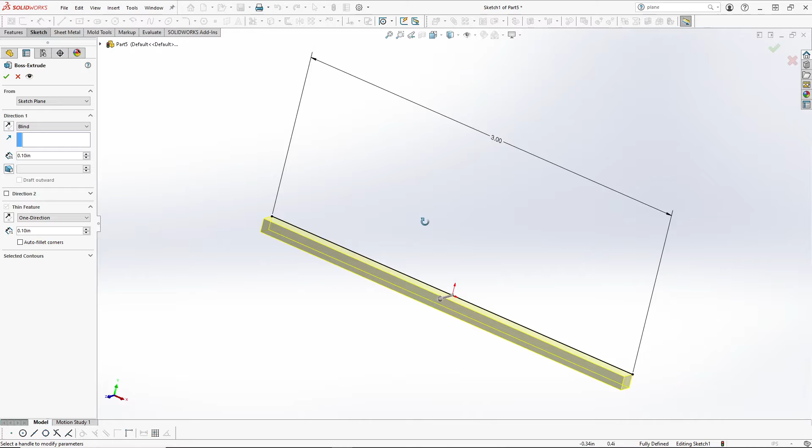Now this allows you to create a thin feature. It automatically associates itself as such because you used only a one-dimensional object, and it's going to project 3 dimensions from that single dimensional object. Now if you look at the line, you can see that depending on the settings, it projects the other 2 dimensions in various ways. So if we're looking, this is the line that we started with, and this is the projection.

So if I change the direction, it changes which way it extrudes the thickness of the material in that way. Same with a thin feature. Now, if we set both of these directions to midplane, then you'll notice that the line that we drew is centered. So it's projecting 1/2 of the depth in both directions.

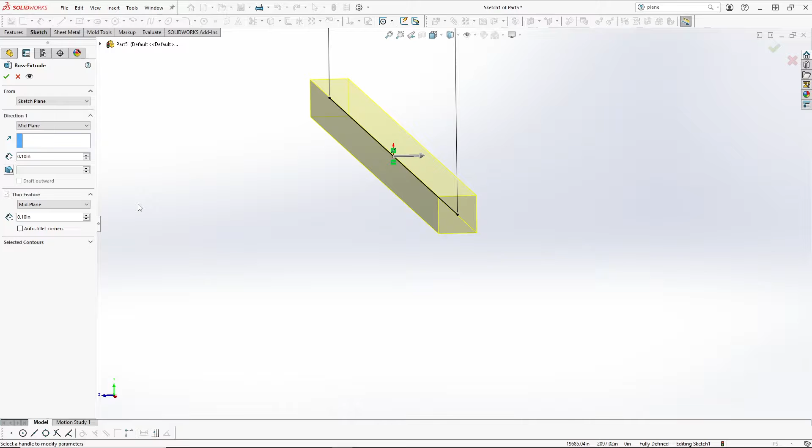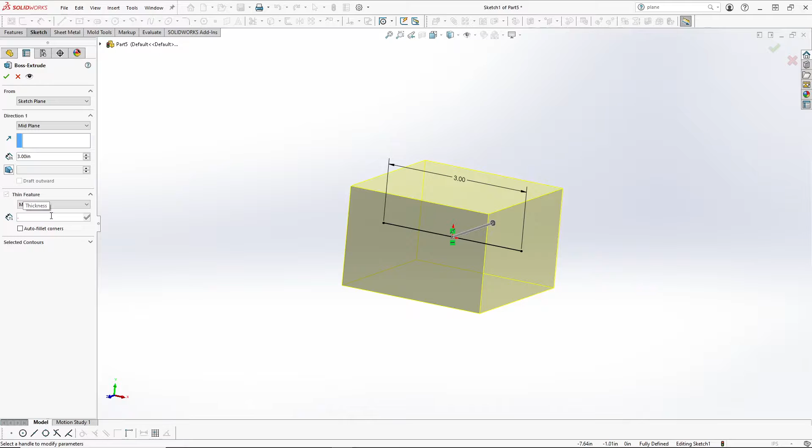With it categorizing this as a thin feature, they do not set limitations for how much thickness you can apply. So you can start with a line and actually end up with a cube. You can make cubes of different thicknesses just depending on which way you want to go with it. It really doesn't matter. You can also do 0.05 and basically create like a piece of sheet metal. The possibilities are endless with just a line and this command.

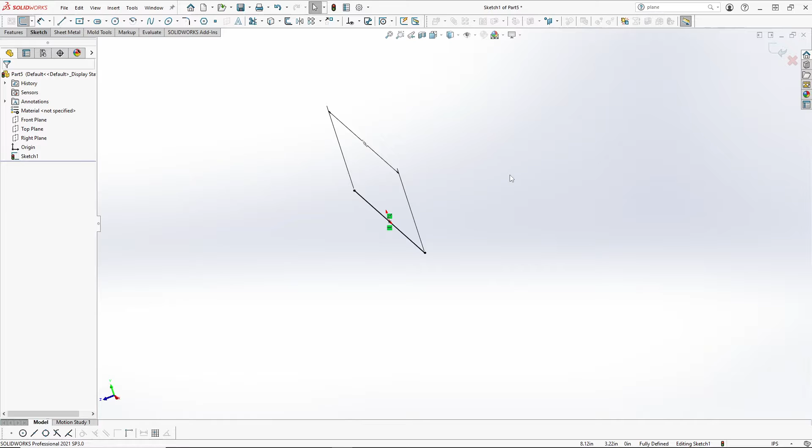Let's back up and look at this same concept but with a different shape. So I'm going to go ahead and get normal to the plane, delete what we just put in there, and let's do a center rectangle. Again, for the purposes of this tutorial, it doesn't really matter what size you make it. And then that time I used the escape key to exit the command. I could have also clicked the OK or the green check mark.

Now, we will go back into our Extruded Boss/Base command, and you will notice that it is assuming that you just want to make a 3D solid object based off of two-dimensional objects. You have dimension 1, dimension 2, and this will be your third dimension, the thickness or the extrusion. So we can play with the different settings, put in whatever thicknesses we want, utilize mid-plane. It's pretty versatile.

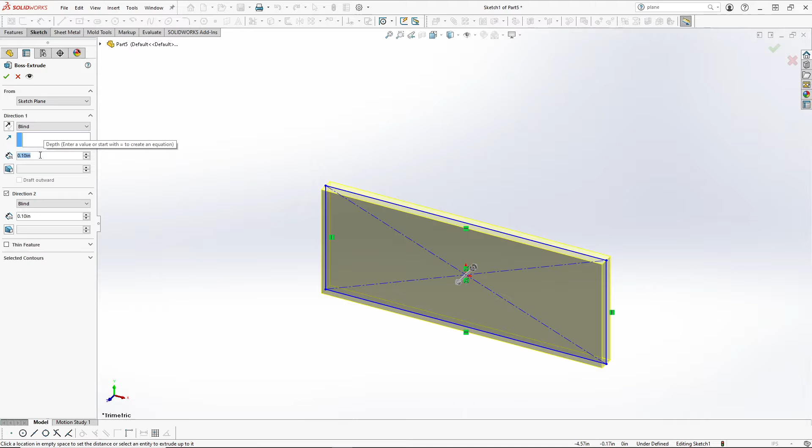Now, if we take off mid-plane and go back to blind, which means you just enter whatever information you need here, and I select direction 2, this gives me the option of setting different extrusion thicknesses on either side of the plane that's associated with this 2D sketch.

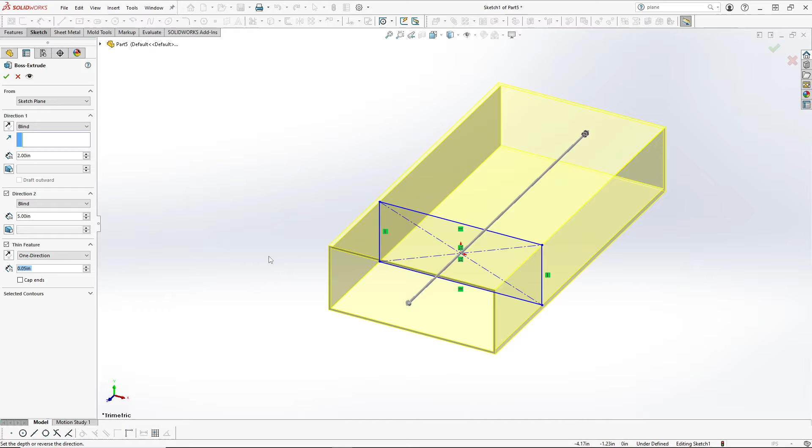You also notice that you have the thin feature as well. What happens when we click that? Well, its default setting is 0.10, and I've been playing around, so it's 0.05. So what this does here is it gives you basically a hollow or a chute, maybe a piece of HVAC equipment or ductwork, if you will.

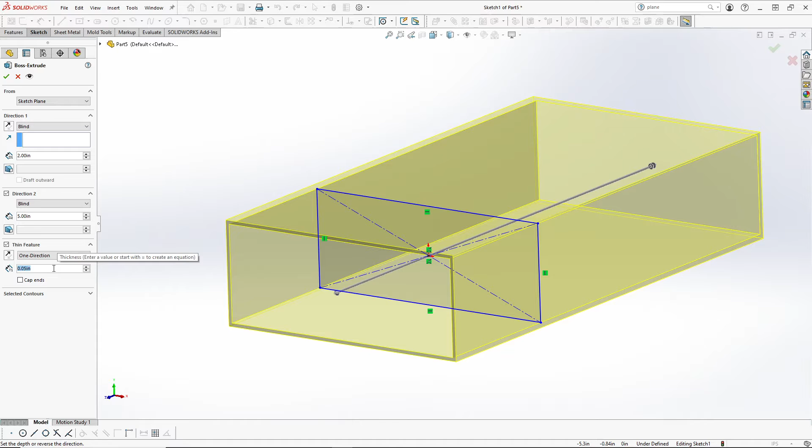And depending on the variety of selections, there's a multitude of operations that can be done with just these options that would normally require you to create a sketch, create a solid, create another sketch, cut through, add dimensions, multiple sketches, just to achieve the same geometry such as this, which I think is really cool that you can do all kinds of different things with just a little bit of effort. You can create some complex shapes with this simple command. It's very, very, very nice.

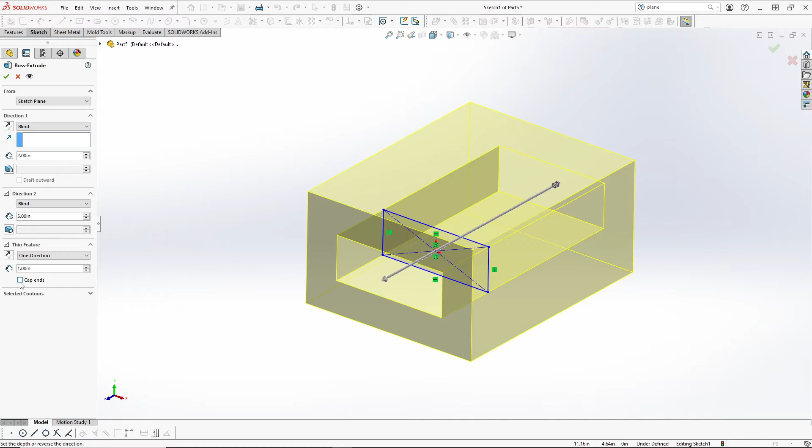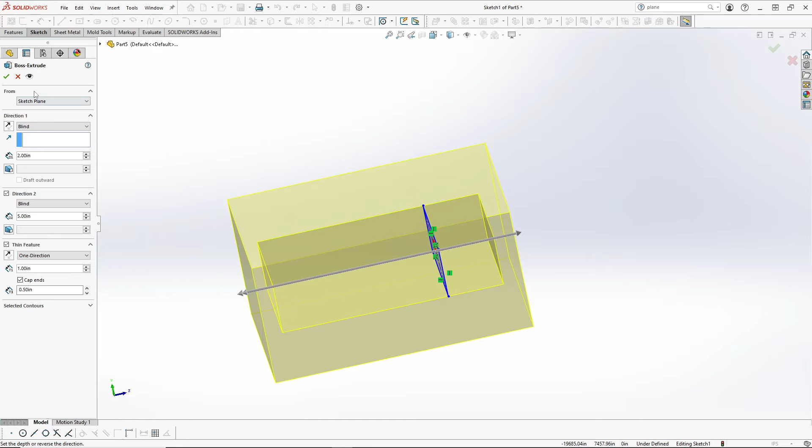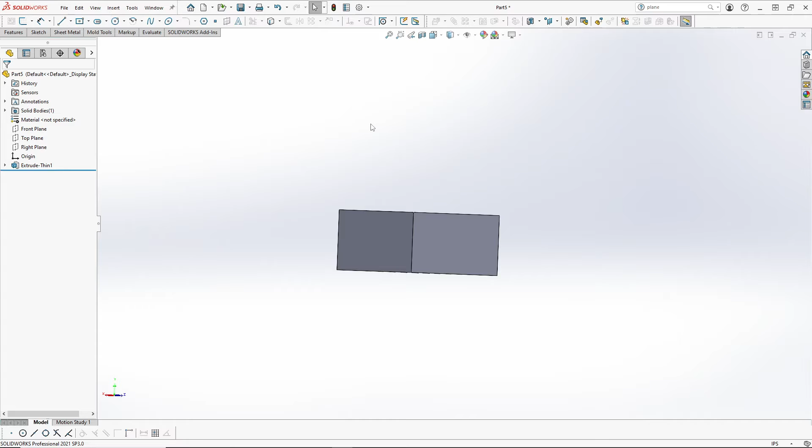Now, if we activate this cap ends choice, it closes off the ends. And let me make that more apparent here. And this gives you basically an impossible manufacturing component. There's no way that one can manufacture this in the real world. It's basically a block with a hollow inside, and that's not achievable with any type of manufacturing. Unless you create weep holes, welds, hollows, and different parts to assemble to make something like this. You just can't produce this.

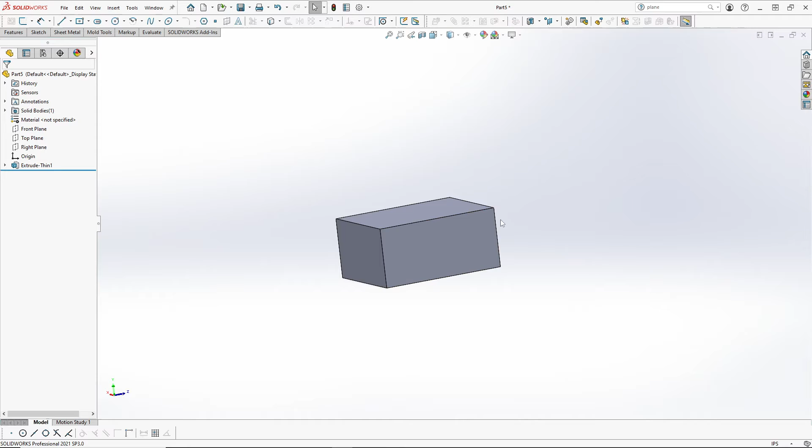And this is a very important concept to take note of when designing. One must be familiar with various manufacturing techniques to know what is possible and what isn't. Let's go back, and I'm going to delete all of this, and I will show one more shape to kind of round out this tutorial. Let's do a circle.

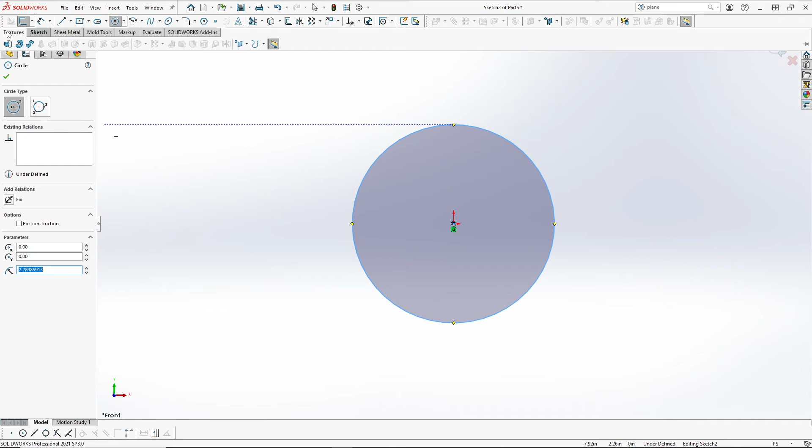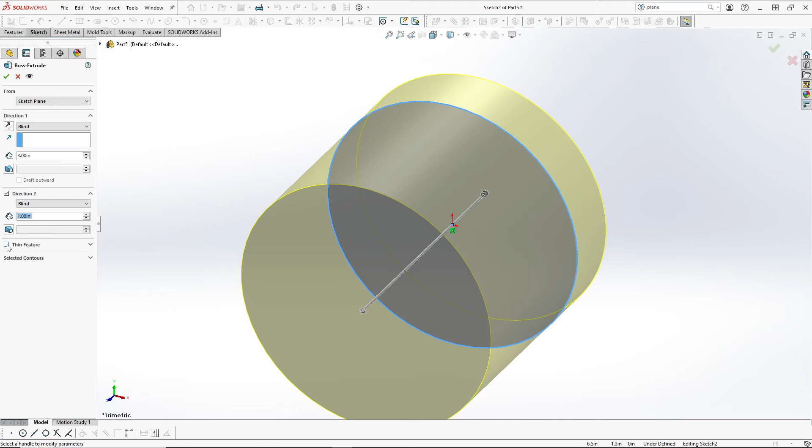And again, we'll select our Extruded Boss/Base from the Features tab. And with the same type of options, you can do a lot of different things with it. And if we have the selection as blind, we can do the same thing that we did with the rectangle. And if we activate the thin feature, it does the exact same thing. So you can create pipes this way.

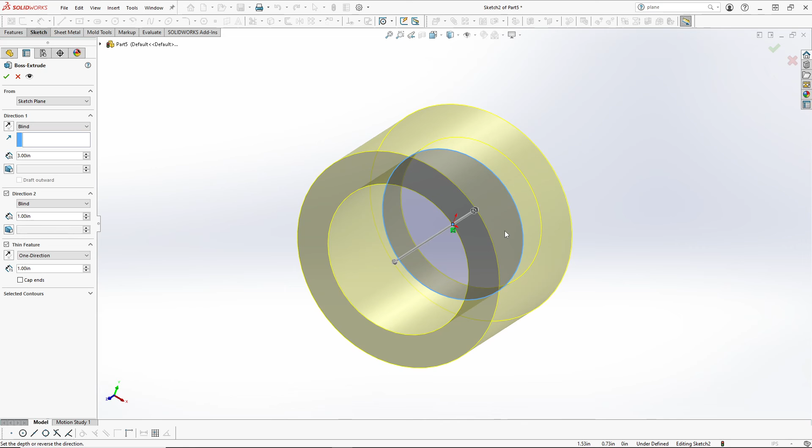Which is really fun. So be sure when you're doing some design yourself, definitely practice and play with all the features and options to get an idea of what happens when I click this, or what happens when I do that. The extruded boss base command is very powerful, and it is extremely simple to work with. So like I said, definitely experiment with it. And I hope this information in the video assists in your design efficiency.